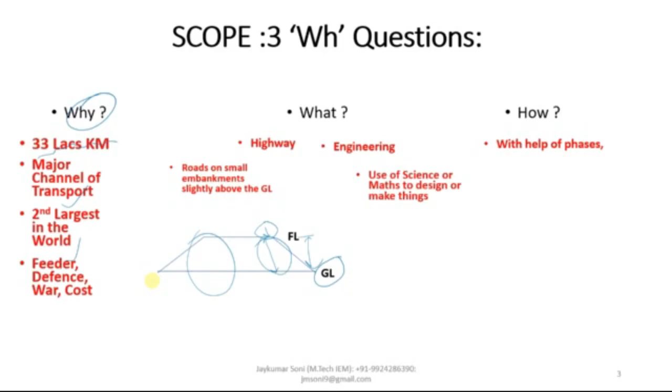What is engineering? Engineering is the use of science or maths to design or make anything possible. Now, how can the scope of highway engineering or transportation engineering be implemented? We need to understand certain phases like development planning, alignment, highway geometric design, highway materials, pavement design, pavement construction, pavement maintenance, various economic criteria considerations, and traffic engineering. This is a brief of this topic - what is highway and how can you differentiate a road from a normal highway.

Whenever a road is constructed slightly above the embankment - embankment means slope - if the road is constructed on a slope which is higher than the ground level, as you can observe in this sketch, this is called a highway.

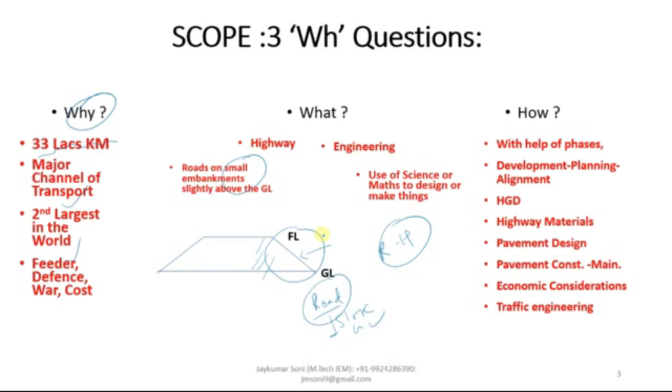Now let us learn about the characteristics of road transport. Following are the main characteristics: the movement of passengers and goods is facilitated from one place to another with the help of roads only. Roads serve as a feeder line - if you want to catch any railway, airway or waterway, you need to reach that location with the help of a feeder line, that is roads.

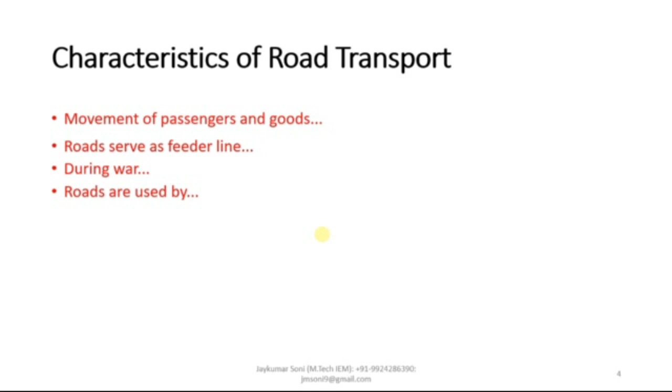During war times as well as peace time, the network of roads is an asset to national defense. Roads are used by various means of transport such as road vehicles, animal carts, pedal cycles, rickshaws, automobiles, passenger cars, etc. Railway tracks can only be used by locomotives and wagons, and waterways are used only by ships and boats. So roads serve as a major transportation feeder line.

Road transport offers complete freedom to road users, as they can transfer their vehicle from one lane to another according to their need and convenience. Road transport saves time, particularly for short distance travel. Better law and order can also be maintained through a good network of roads in the country.

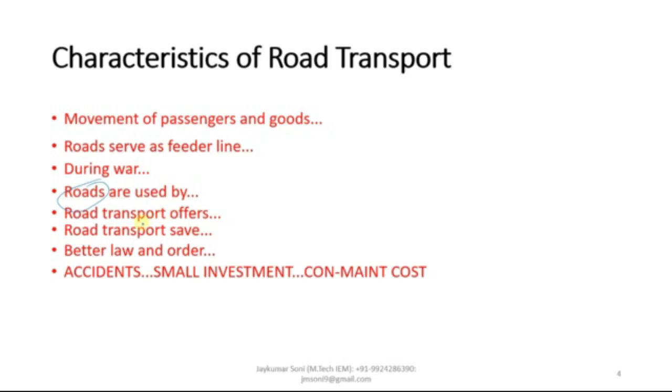One minus point about road transport is that the fatal casualty or accident rate is quite higher in the road network as compared to railway and airway traffic. But the investment involved for construction and maintenance is very small, and the construction and maintenance of roads is cheaper than railway tracks, docks, harbors, and airports.

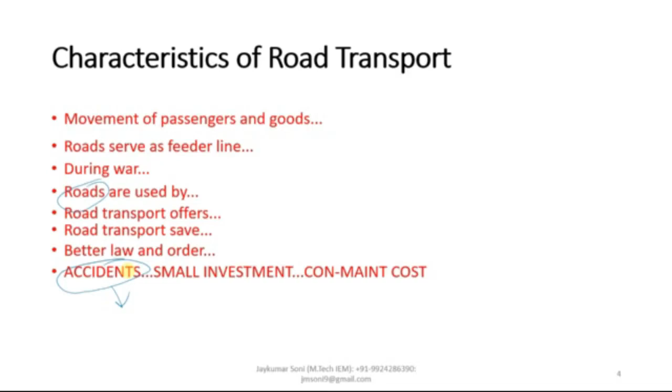So these are the various road characteristics: it helps in the movement of passengers and goods, it serves as a feeder line during war times, it also serves as a feeder line in general, it is used by the majority of commuters, it offers savings in time and cost, and it helps in the implementation of better law and order.

Now, what are the advantages of construction of any kind of roads? These are the following advantages: first, they are essential for economic prosperity and overall development of any country - looking at a wholesome scenario, it plays an important role in economic prosperity. Another advantage is that roads play a vital role in national defense, as mentioned earlier. It promotes national integration, and it also promotes social and cultural growth.

They prove to be comparatively cheaper and convenient as compared to other modes. So, cheaper and convenient.

Then they assist in maintaining law and order.

The other point is that they provide good commercial links also, in the whole country.

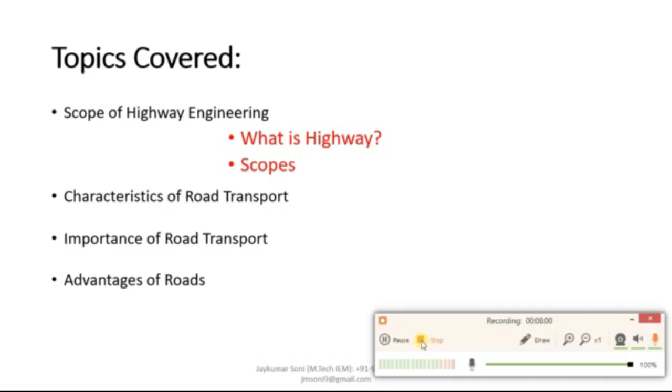Let us discuss in detail. The first topic is the necessity of highway planning. We have learnt in our previous lecture that before jumping into any topic, we need to encounter three WH questions regarding any topic: what is that particular topic all about, why is it required to be learnt, and how it can be understood easily. So let us understand why highway planning is required, or what is the necessity of highway planning.

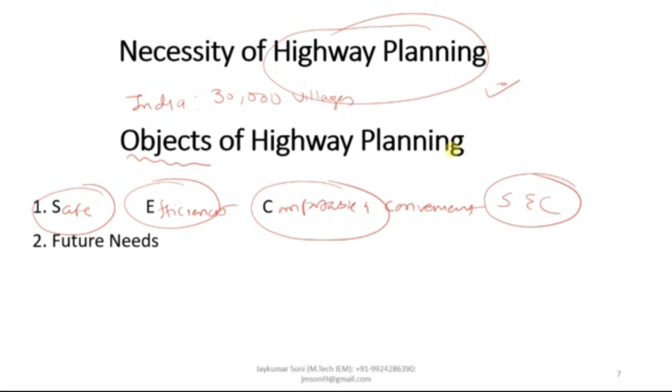Now another point is about the future need. So to plan for the anticipated future development and social needs, future needs and social needs, you need to provide highway planning or thorough highway planning.

Then the third point is about maximum utility in present. To plan for a road system having maximum utility within available resources, keeping in mind the fiscal, budgetary and other administrative restraints, you need to provide highway planning. Now another new word is introduced, called fiscal - the meaning of fiscal is financial. In order to plan a road system which can be maximally utilized in terms of financial, budgetary and administrative systems, you have to perform highway planning.

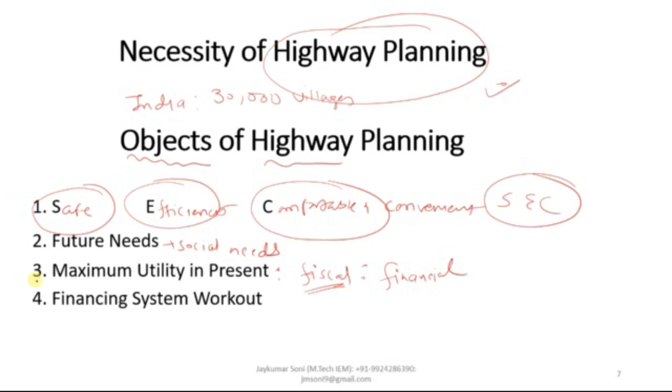Then, to face the road development program from a financial consideration, or to work out the financial system, you have to provide highway planning efficiently. In order to make this road development program efficient and convenient for the people of a country like India, you have to divide this construction process into various phases, with consideration of financial resources.

This is how objects of highway planning can be understood. First you need to provide safe, efficient and comfortable travel. Then you need to provide for future need and social need expansion. Then you need to allocate and analyze resources with maximum utility in the present scenario.

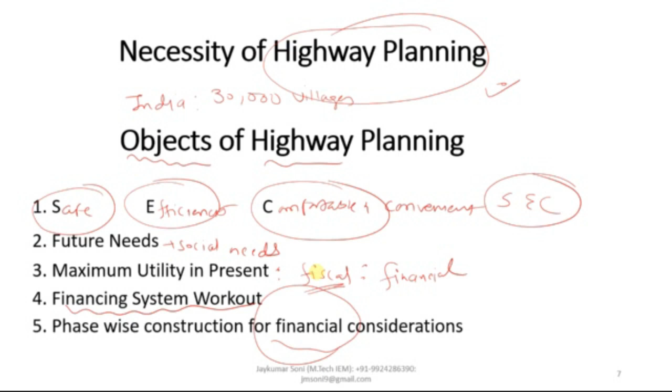You need to work out the financial system and phase-wise you need to divide the construction process, with consideration of financial resources. This is how the object of highway planning can be understood.

Now let us discuss road classification. This is a particular topic which will stay with you till the last breath of your transportation engineering segment. Road classification can be easily understood with the concept of PSC. This is a unique method that I am going to narrate, and you will never find this method in any other books or resources. You can divide the road according to P, S and C: on the basis of P, you divide on the basis of pavement surface; on the basis of S, roads are divided based on seasons; and on the basis of C, carriageway.

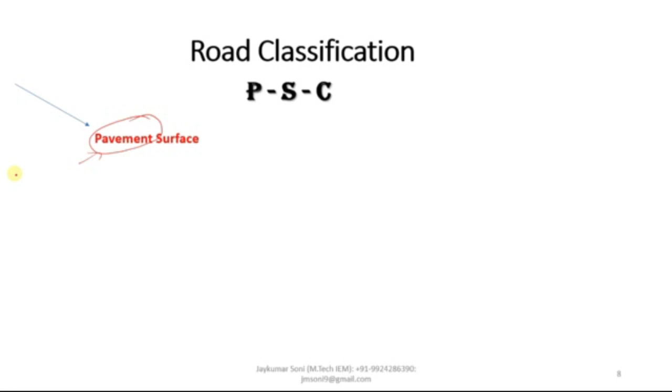So let us first discuss the pavement surface classification of road. How can this be understood? What is this pavement? Pavement is the upper surface of the road on which vehicles are driven. This is called the pavement surface.

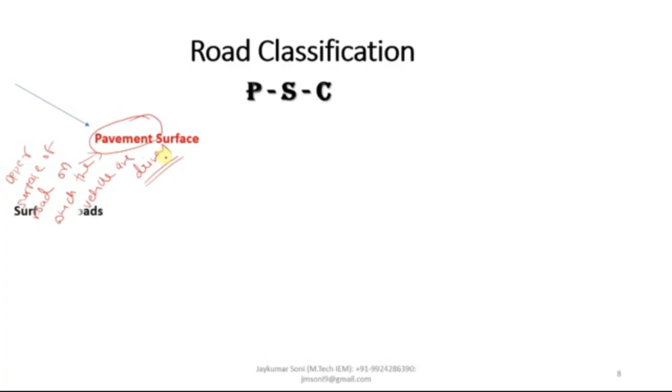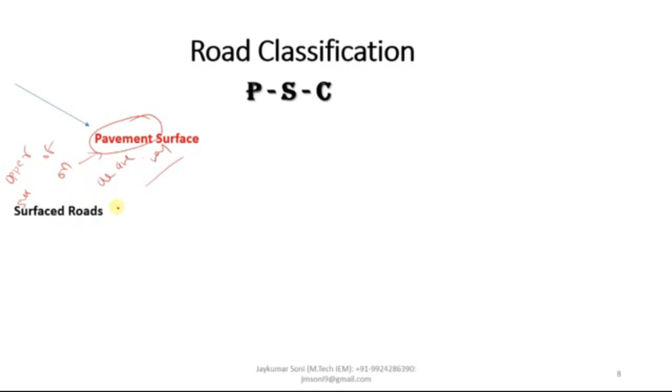Pavement surface, or roads based on pavement surface, can be divided into two parts: surfaced roads and unsurfaced roads. Surface roads are those provided with bituminous or cement concrete surface, meaning you can observe the element of bituminous or cement concrete on the surface. Unsurfaced roads are those not provided with bituminous or cement concrete surface; you will not observe such elements. These are known as surface and unsurfaced roads, classified on the basis of pavement surface.

Now let us learn about season-based road classification. Roads are classified into two categories depending on whether they can be used during different seasons or not: all weather roads and fair weather roads. All weather roads are those which can be used during all seasons - summer, winter, or monsoon - except at major river crossings where interruption to traffic is permissible to a certain extent only.

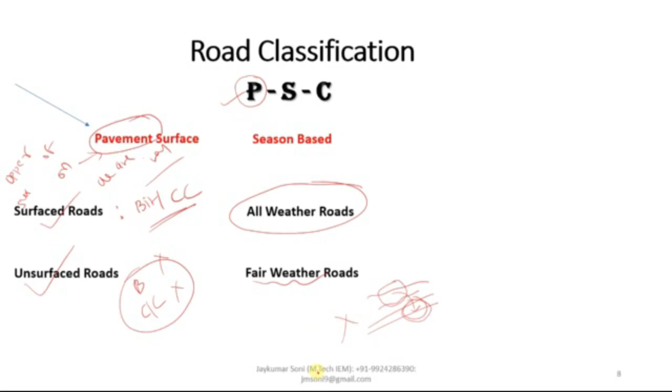The road pavement should be negotiable during all weather, so these are roads usable during all seasons. Fair weather roads, on the other hand, cannot be utilized during all seasons; traffic may be interrupted during monsoon season. Sometimes at causeways, streams may overflow across the road, and when the stream overflows, the water comes onto the road surface, making the road non-functional during monsoon. These roads can only be used during certain seasons and are called fair weather roads.

The third classification is based on carriageway. Carriageway is the surface of the road on which vehicles are driven; this is also called pavement. On the basis of carriageway, there are two classifications: paved roads and unpaved roads.

If the roads are provided with a hard pavement course, which should be at least a water-bound macadam (WBM) - we will learn about WBM in our next topic on highway materials - then such WBM roads, mixed carpet roads, or cement concrete roads are considered in the category of paved roads. If they are not provided with a hard pavement course of at least a WBM layer, it is called an unpaved road.

This means roads made with earthen roads, gravel roads, or aggregate roads, which do not have any kind of paved surface, are known as unpaved roads. So pavement surface (P) can be divided into surface and unsurfaced; season (S) can be divided into all weather and fair weather; and carriageway (C) can be divided into paved and unpaved roads.

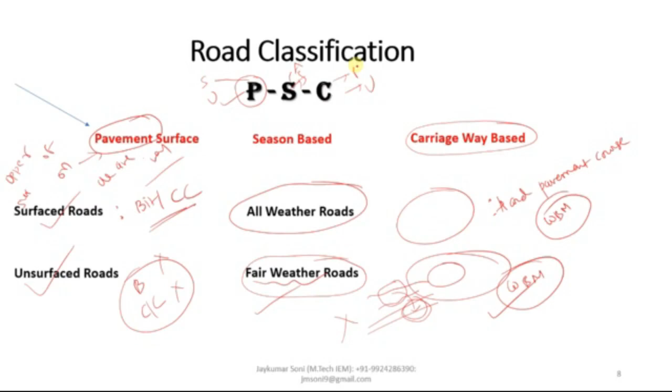So we have learned about road classification. We have understood the concept of objects of highway planning, necessity of highway planning, and that 30,000 villages in India are not connected with any village road link. This is why you need to learn this particular segment of transportation engineering.